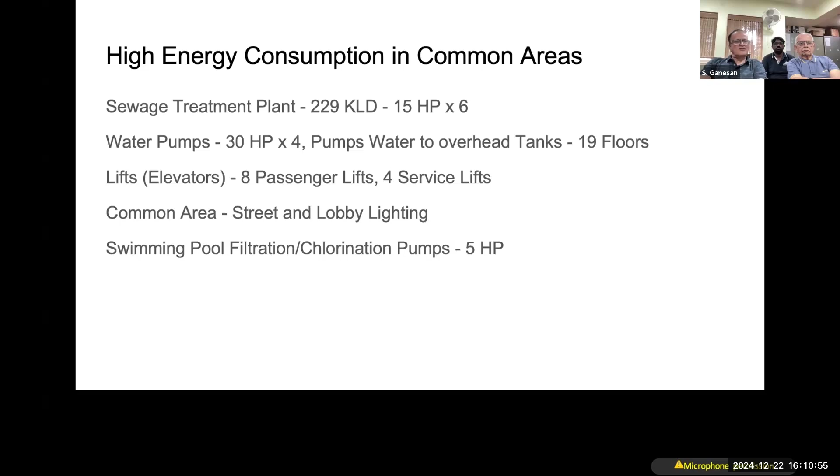What contributes to this bill is majorly the sewage treatment plant, which has something like 6 numbers of 15 HP pumps, and the water pumps for drinking water, plus recycled water to the overhead tank, as our building is around 19 floors, and lifts, common areas, street and lobby lighting, swimming pool chlorination, filtration, all those things. These are the major loads we have. And this is something we have been highlighting throughout the presentation: how we have been pushing for clean energy, personally as well as a community, not only for power, but for other areas as well.

What are all the considerations here? Based on the available rooftop area, we determined that about 300 kilowatt peak was possible, not more than that, but we could have possibly gone for less. But we have other considerations, like we have 6 BESCOM meters. We are not talking about the residential meters. For the common load, we are connected to BESCOM through 6 independent meters. Each meter has a capacity of more than 50 kilowatts. Sometimes it could be 60, sometimes 120. It was all above 50 kilowatt. So it made sense for us to go for solar power.

Maximum allowed at that time was 50 kilowatt, so we decided to go for 50 kilowatt each, except where it was less than 50 kilowatt. This is what made us look at 50 kilowatt as the individual solar generation capacity. And actually 50 kilowatt was not allowed by BESCOM. We had to slightly reduce it, so we ended up with 49.5 kilowatt peak.

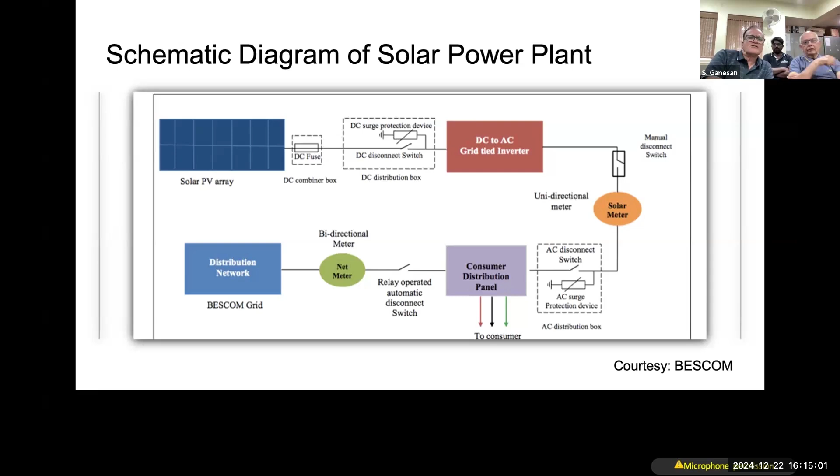So to put it simply, the net meter is a new one. This is the basic explanation about what net metering is all about. Maybe most of you know about it, so I don't want to linger too much on this.

So here we have represented a house - I'm sorry, it is not actually an individual apartment, it is the common load for the apartment. From BESCOM on the right side, the one which is N is called the net meter. The net meter is supposed to be a bidirectional meter. From the solar panel we have an inverter, which converts the DC from solar into AC, and the AC is fed into this junction point - that's a unidirectional meter. So right now, what is involved is to put this bidirectional meter, the solar panels, inverter, and the meter. This is what the total project installation entails.

If you talk about what 'net' means, it is this meter which is actually doing the net of what you import and export. All these years, possibly we have only been importing energy from BESCOM. Once you connect the solar, there are times when you would be exporting power - say on a holiday with low consumption, solar power could be exported back into the grid, especially peak summertime on a holiday season. So this meter calculates: whenever you import energy from BESCOM it rotates one direction, and there's another calculation for the net export from the whole system. The difference is the net import - that's why it's called a net meter, and that's what you pay BESCOM at the end of the day.

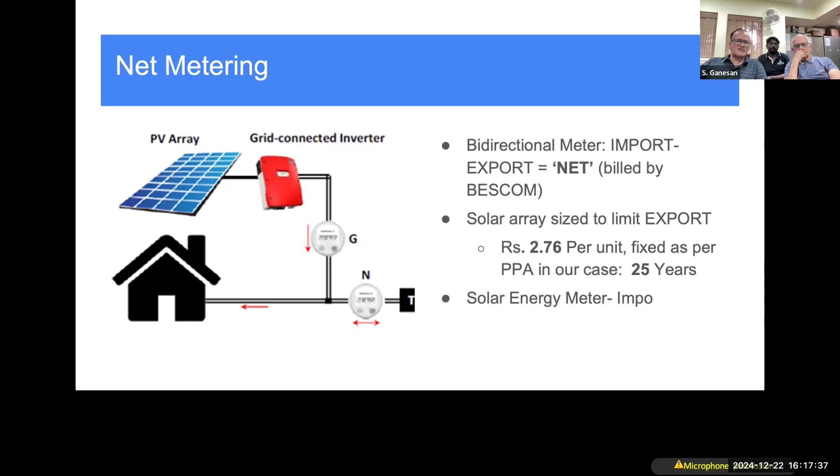A few highlights here: we should realize one or two points. One is that when the BESCOM power is out, the solar inverter would also get automatically switched off. So let us not imagine that when BESCOM power is off, this would act like a UPS and supply my load. No, your DG system would continue operating as usual as if there is no solar installation.

Number two, most of the apartments are quite tall and prone to high wind situations during some seasons. So as an extraordinary precaution, we made sure the panels are installed lower than the parapet walls on the 19th floor. I have seen some installations where they raised it above the parapet wall through structures. That has to be checked through a civil structural engineer. We did check the additional load at the top of the floor and what implication it would have on the structural stability of the building. So those things also need to be looked at.

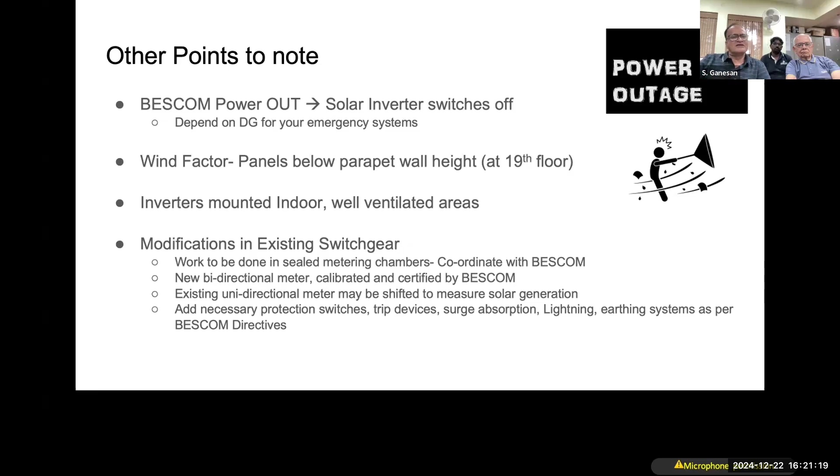The fourth point is that the solar portion is one part of the story, and the other part is that we need to modify the existing switchgear in your system to get this new power into the system. That's a bit of a challenge, not very difficult, but it has to be accounted for in your overall budget and time frame. It involves opening up the metering chamber of BESCOM, so you cannot do this on your own. It has to be coordinated with BESCOM, because you are changing out some meters and putting in a bidirectional meter. All this is explained further, but just to caution you, a few points I have highlighted here.

This highlights what we have done. You would see that the panels are simply supported on concrete blocks, such that in case of heavy wind force the whole thing wouldn't fly off. They are well anchored, but not anchored to the ground - they are simply placed on what we call a waterproof floor. That is also another thing which took quite some time, because once you install this, you may not have an occasion to remove it again and do waterproofing of the roof later. So take this time into account in your overall project schedule. Once it starts leaking, you may have a problem. This is another important factor.

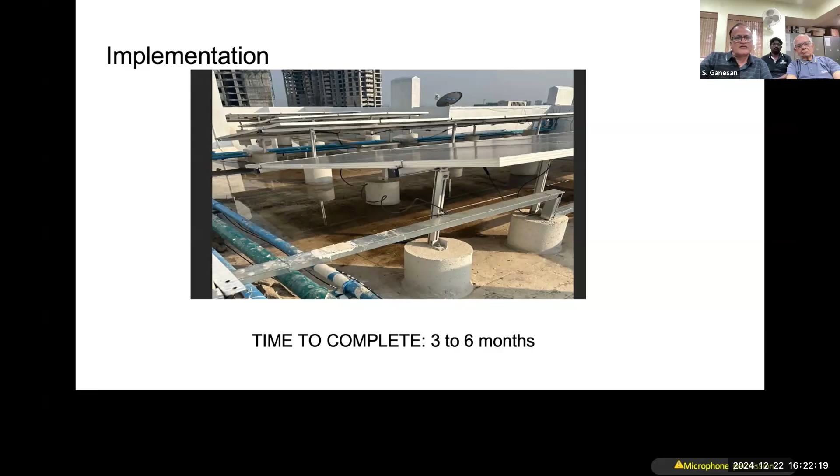We would suggest it takes 3 to 6 months. I think BESCOM themselves, once you go to them, will give you a time frame within which you need to complete. So please take care of this also in your schedule.

So how we went about doing it within this complex, we had two subcommittees majorly. One was to evaluate technical as well as commercial implementation aspects. We had a gamut of experts within our residence - one was possibly a lawyer, one was dealing with money, one was dealing with technical. The team here is all technical people majorly, but earlier, thanks to people like Arun and other experts including lawyers and chartered accountants, we had put all of them in the subcommittee.

So that we have a wider perspective about the whole issue here. And then we also referred to BESCOM documentation. We had a lot of discussions with them. BESCOM has excellent documentation on the website. We also visited multiple apartments in our neighborhoods, also some other schools and other places where we had evaluated multiple vendors. We also visited some of the locations and we learned a lot along the process.

And then the last but not the least is to have an AGM to convince the owners on the benefits. To put it in perspective, both what goes out of your pocket and what goes to the planet from an environmental perspective. So all those things we had to plan.

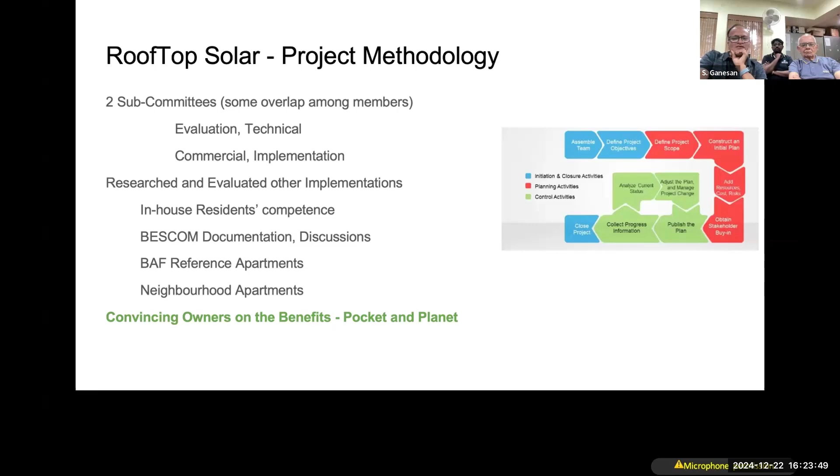Just a ballpark estimation, take it or leave it 20% this side or that side - the area required on top of your roof would be around 80 square foot per kilowatt of capacity. Why is this 80 square feet? It is not just the panel area. You need to give space around the panel for maintenance, walking around, running the cables. So you don't consider just the panel area, but we have considered around 1 meter space all around each panel, a row of panels I would say. So that increases the total area.

And then we had also the water tank above that, so we needed to align it a little bit. We don't say we are totally shade free - some seasons we do have shade - but we have to optimize the whole area in such a way that at least in summer we get maximum generation.

How much can I generate? I've just given a picture here, it may not be very relevant in this context, but the fact is BESCOM has given you a particular capacity. You have a maximum demand - if you see your bill you will find maximum demand, it could be 50 kilowatt or 100 kilowatt or so many HPs. That's the cable size they have provided to cater to your load. Naturally, you cannot have a Raichur power plant on top of your roof and then try to pump more than whatever sanctioned capacity is. It's purely a technical point, and BESCOM would insist on that. So that's the maximum capacity you can have on your rooftop.

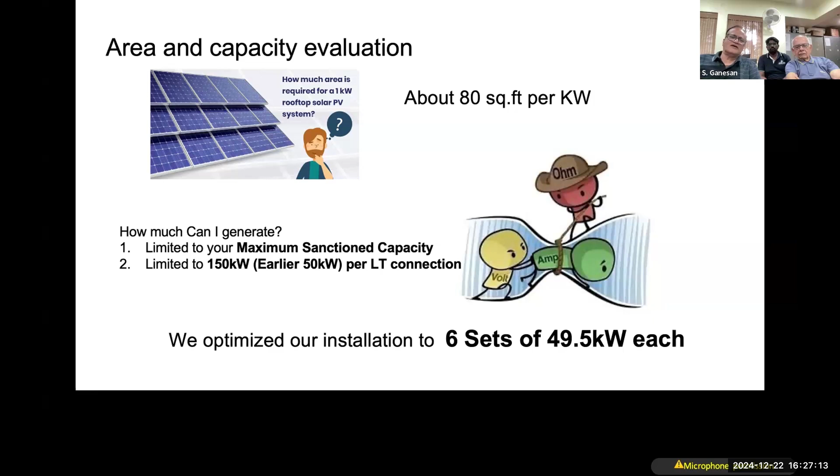Okay, so when you do this, naturally, everything is not in your hand. A few considerations or constraints, I would say, are this. BESCOM to approve projects, because that's the main approving authority, at least in Bangalore. If you're in another city, you need to consider other local things. In case you are talking about a very big plant, then CEIG also gets involved. But there is an exemption by CEIG for rooftop plants limited by BESCOM approval.

And time to complete, I briefly mentioned about it earlier. And waterproof the roof floor. Safety of personnel and residents during construction. This is very, very important because you need to move mountains of material through your lifts, possibly through the lobby or your parking area. You need to temporarily store it. You need to take it up. So this calls for some amount of management by the management committee there.

And we did have the subcommittees who would continuously supervise both on commercial and technical aspects. So thanks to our residents, we did have an excellent coordination there. So we could continuously monitor and bring it to a successful completion of commissioning.

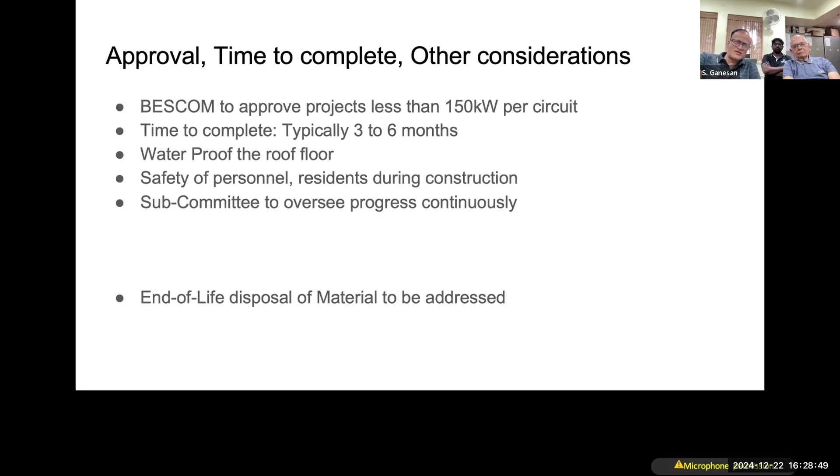And what we have not considered at this point would be what to do with these panels at the end of the life, which is around 25 years. This is a big challenge, not only for you and me, but for the whole humanity. So not only for this, but all the other electronic material, we all know for sure. So this is an open point we need to at least keep in mind.

Okay, the panels are spread across all towers. You can see that there are 4 clusters. Each tower is actually 3 subclusters. This is the picture I picked up from Google, just to give you an idea of what we are talking about. You can see it is almost packed to capacity. So each subsystem is a set of 99 panels. Each one is 0.5 kilowatt peak, 500 watts. So 500 into 99 would give you 49.5 kilowatt.

And we procured these panels from Trina Solar, which is also having a local office here, and I think manufactured in China. And string inverter is what we have decided. There are multiple things we considered, but we decided to settle for string inverter, which is a Sungrow. It's basically a Chinese company, but they also have office here. And as far as the inverter is concerned, it has got an input maximum of 500 volt DC and output is 415 volt 3-phase 4-wire AC. Sorry, it's a bit technical, but I thought I'd just share this information for everyone's use. I'm running short of time a little bit at this moment, I guess.

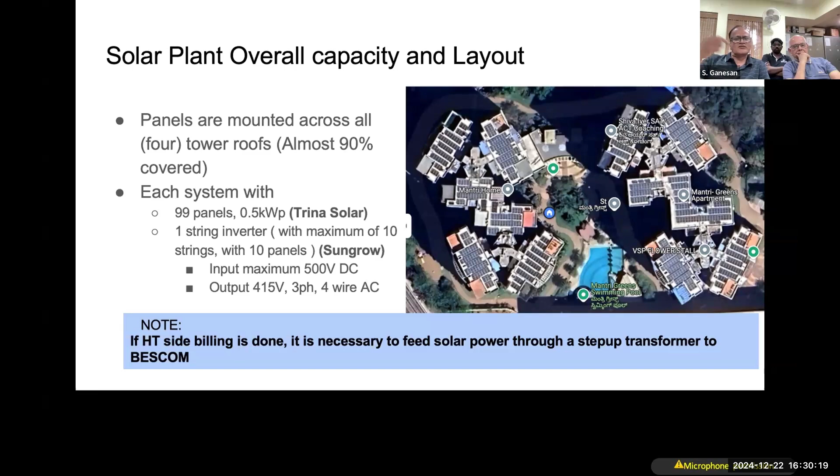The accessories that go with the solar panel, one would be basically the inverter. We have decided to put it indoor, though the vendors would say you can have a small shed kind of thing and put it outdoor. From pure personal safety as well as longevity of the sensitive equipment, we have decided to mount it indoors. We did have enough space in the roof floor where the stairs end, so we have mounted the inverter and associated protection fuses and MCBs, switches in the same floor as the rooftop solar.

And you can see the power cable running from here. So the individual cables are coming in here from the solar panel, not visible here, but the inverter converts it into AC. This is the three-phase 415-volt cable going to the substation in the ground level. And this is the substation panel in the ground level, wherein we have made the modification I was mentioning about, changing out the meters and other things.

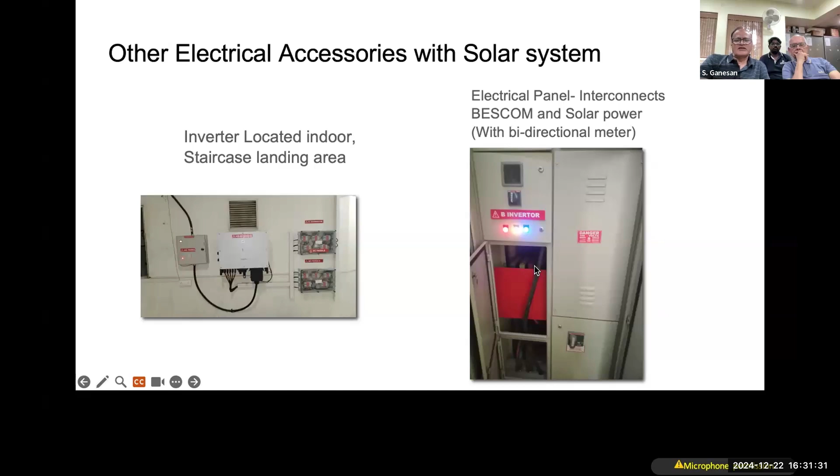So the other most important thing you need to look at are continuous performance monitoring, operation and maintenance. So I initially mentioned that we had a bill like 5.5 lakhs every month. I'm glad to say, thanks to everyone here, we have reduced the bill to about 1.5 lakhs. The energy saving is around 70 to 75% per month. Possibly in peak winter time, it may get reduced to 60%, but by and large, we are very happy about the overall performance of the system.

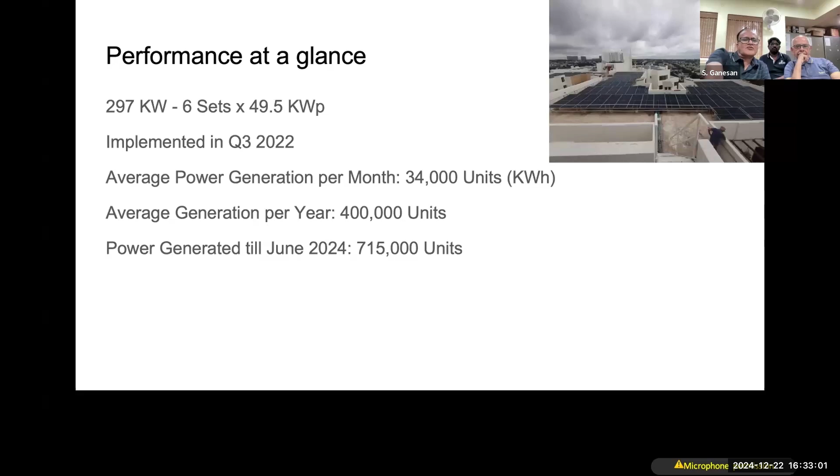So this is just a summary of what we have achieved so far. The first two lines are what we have done earlier, and then this is the total generation we have done so far. I just leave it to you. Consumption per year? No, it's only 1 year. Is it 1 year? Per month? No, I'm talking about the whole thing, per year. I'm talking about the last line, 715,000 units we have saved till now. Yeah, generated.

So we expect full recovery on the investment by 2029, another 4-5 years to go. And by 2047, we expect this to be totally decommissioned. And you might also be aware that the efficiency of the panel compared to when it was brand new would go down by 0.5 to 1% every year.

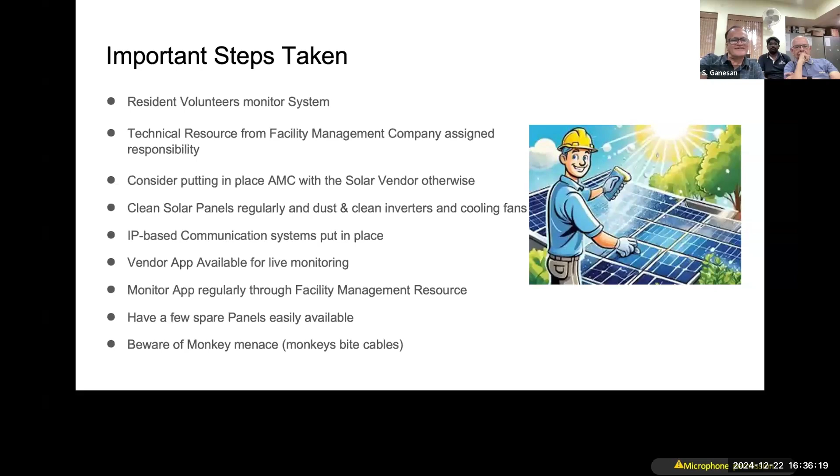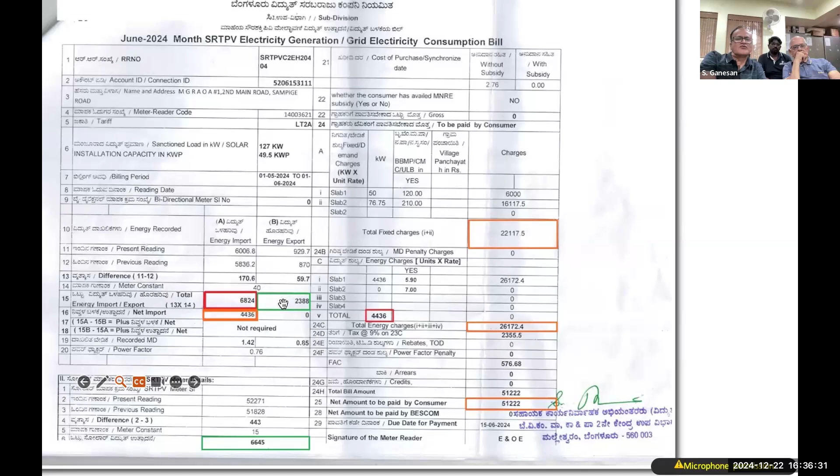Another interesting thing I want to share: the previous summer we had a hailstorm. Nothing happened to the panels, so we were keeping our fingers crossed. Everything was fine, so we are very glad about that. And this is a typical BESCOM bill. I don't want to get into the detail. What is important to know is that BESCOM gives two numbers: energy imported and energy exported. The difference is what you have consumed or exported net, and based on that the billing is done.

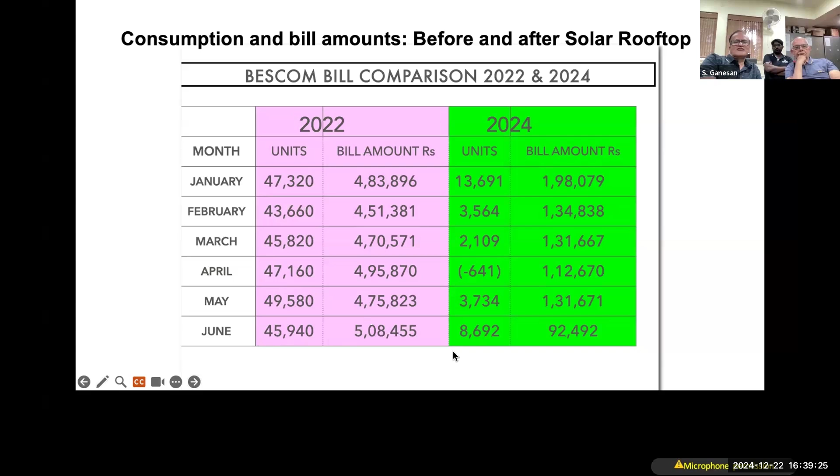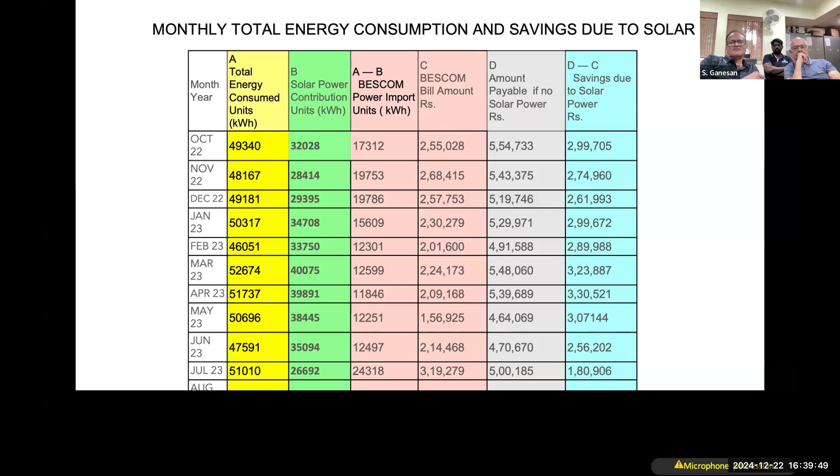So we have an analysis being done every month, and it is reviewed by the volunteers, the facility management, and it goes to the management committee for review. And we have a screen in our management committee room where live performance of this plant gets reflected every day. Whatever you see here is also reflected there.

So this is a summary of what has been achieved in 2024 so far. This is the monthly total energy consumption, of which solar has contributed 60 to 70%. In the month of April, it was even exceeding the total consumption. We did have net export from our system. So as I said, we have optimized in such a way that we don't export too much throughout the year.

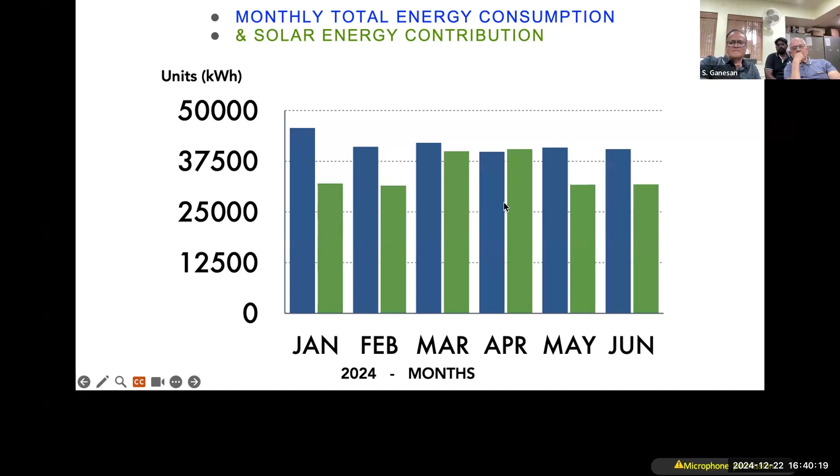And this is something beyond our individual apartment complex. We talk about what is going to be saving for humanity as a whole. In addition to whatever we save, BESCOM and KPTCL would also save 1% each towards transmission and distribution losses of whatever power you are consuming. This is another thing which we are not able to project here, but we have calculated very roughly that over a year they are going to save 8,553 units because we have installed solar plants here.

A very conservative estimate. Next steps: having invested some money, we need to also make sure that we bring down our consumption as much as possible. So we have made tremendous efforts to make sure we have LED lighting everywhere in the common area, and motion sensor based lighting. This has reduced our consumption by a great margin. Automated time of day lighting, switch on and switch off for street lighting and other things. And we have also started putting EV charging as a common facility.

In future, when battery prices really come down, we may be able to incorporate battery storage. Possibly we can kick out our polluting DG sets eventually from all our apartments. So this is our vision. At the end of the day, as a community, we are committed to affordable and clean energy. So that summarizes our inputs to you at this moment.

And ongoing maintenance is also an important aspect. Please don't leave the installation by itself. Please, on an ongoing basis, maintain it, treat it, clean it, monitor it. If there are red alerts, please focus and resolve them. Apps are available for you, your services team, to be able to get to know about issues and promptly resolve issues. Yeah. With this, I will focus on Q&A. Unless Satish has to add something, I will jump to Q&A. Satish, you want to add something here?

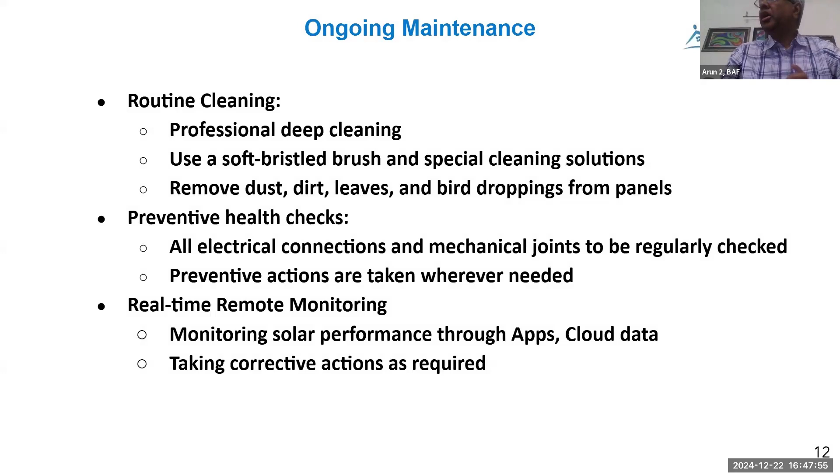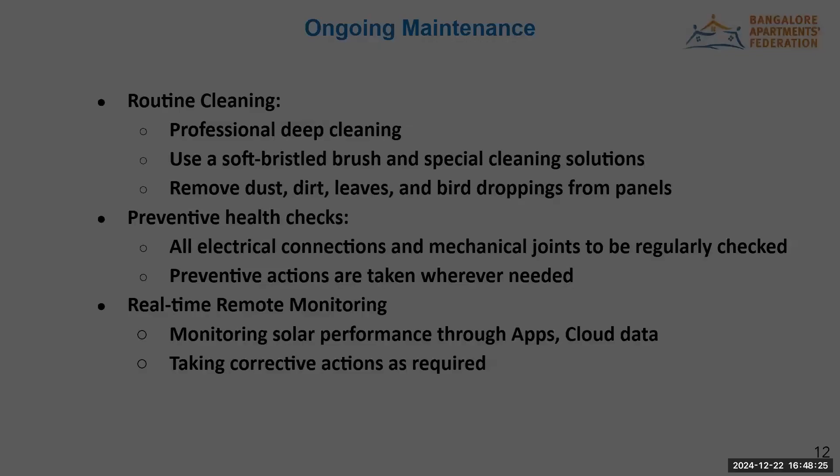Yeah, two, three points. Okay, good evening, everybody. Thanks, Mr. Ganesan and team for the excellent presentation. I think most of the things are covered. But having worked on this policy and solar from 2018 onwards, I just want to share some things. I think Mr. Ganesan mentioned two things. One is future steps. The future steps include going for a storage system. I think that policy is implemented now from KERC this year, 2024. It is possible to do that, provided it is financially viable.

The second thing Mr. Ganesan was mentioning is when there are power shutdowns in BESCOM, the grid is also disconnected. So it is not going to the grid. So there is a problem in the sense you may be producing solar energy and electricity, but since it is connected to grid and net metering, this power is not going to the grid and you are losing. And in some of the apartments in the city, definitely this problem is there. For example, some 2-3 hours every day, power is not there. It is running on DG.

So we have been fighting or lobbying with the government from 2021 onwards. And happy to share that technically there is no problem. It can be synchronized with your DG. And you can save about 80% of the cost of the DG you are running. Because as soon as BESCOM power is switched off, your DG is going to start. So this is possible technically, but of course, government policymakers had not gone through this process. So the Ministry of Power first said that technically there is no problem. We will include this in the next policy.

That way, I think from 22 onwards, now 24, in a recent KERC notification, it has come saying that you can do some synchronization of the DG set when power goes with the solar. So that's a good thing: DG power, diesel cost, you can reduce by 80% if you do that. Subject to some approval and all, that is okay. It was technically possible before, now policy-wise also possible.

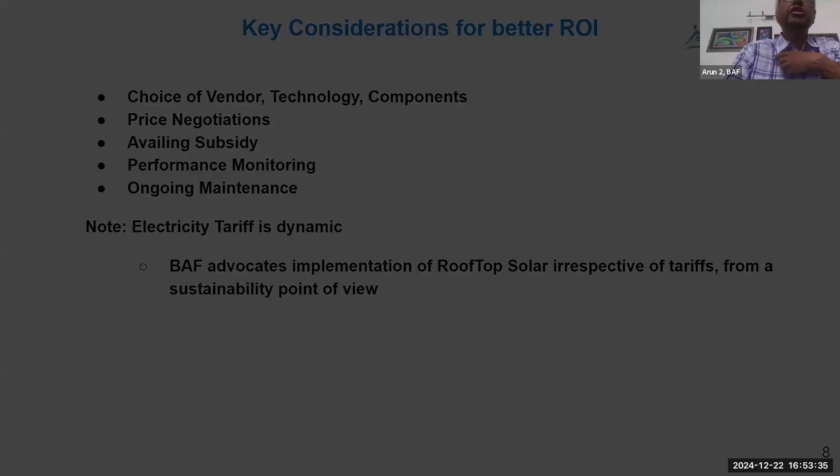Yes. Thank you so much. Thank you so much, Satish. Very valuable inputs. I'll sync up Mr. Ganesan also with you, so that DG synchronization, etc., can be done.

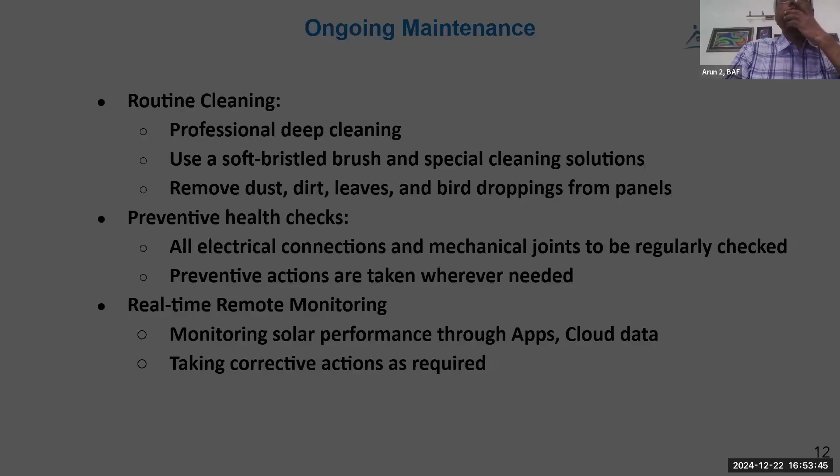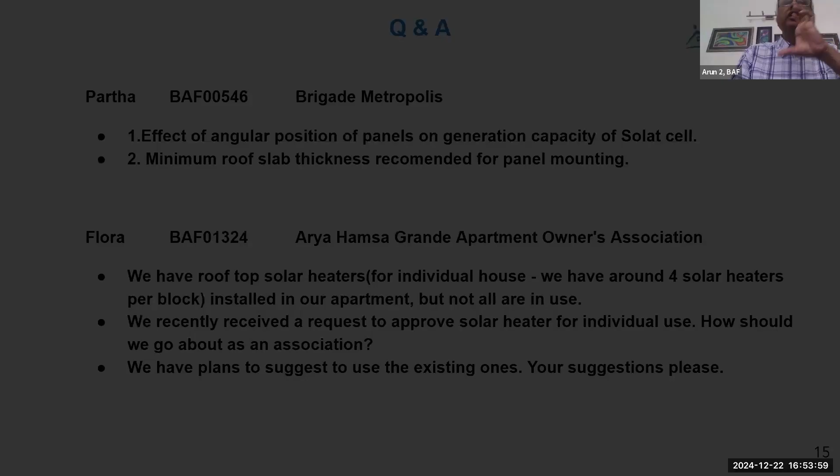Sure. Okay. So we've received a series of questions. Sandeep, I have your set of questions. Partha, Flora, I have your questions. Prakash Shetty. What I've done is logically group them so that we're not going back and forth. Prakash Shetty, Sundararajan Muthusamy, Professor Rajagopalan, Sritej, Parthiv, Vishwa Venkat Reddy. Gyan Iyer excused himself saying he has some guests, but he had a lot of questions. Pramod, it was nice meeting you yesterday at Climate Action, BBMP. Surjit, Natesh Muttanna, Sandeep.

Okay, now coming to the focused set of questions. Mr. Ganesan, Sandeep is asking about technologies for solar, merits and demerits of each technology: string inverter, power optimizer, and micro inverter.

If you can take up this and respond, Mr. Ganesan. I don't have a slide for that particular one. No, not a slide, just look at it. Okay. Sandeep, are you there? Sorry, yes, I'm Sandeep. I'm there.

I think you're on two computers. Mr. Ganesan, can you hear me? I think you have to switch off Mr. Vishwanathan's phone. Please go ahead. Okay, I'll just briefly explain, no need for any slides here.

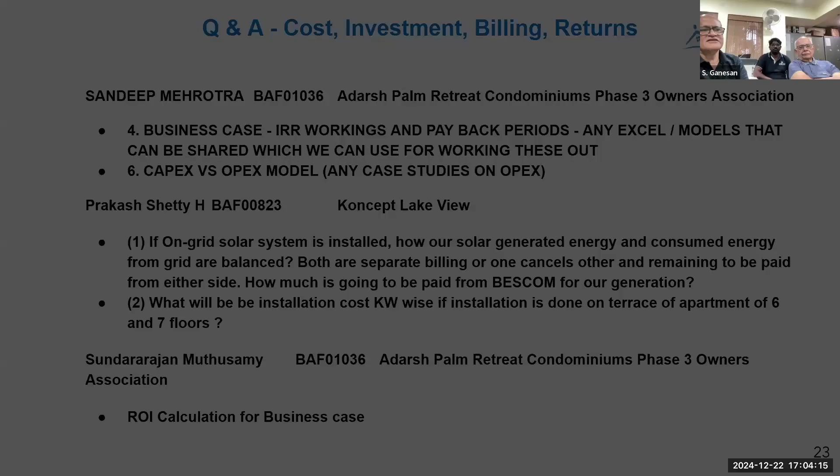That's all I'm saying. Are all panels installed in zero shadow areas? No, so this is where we do optimization. Sundararajan, we covered this question in the previous slide with Sandeep's question. Yeah, that's correct, we can skip it. I think this is best answered, but yes, this was also covered - where you want only AC microinverter or power optimizer when you have shade, a combination should be used. It's not a problem.

Okay, the next broad category of questions is on cost, investment, billing, and returns - again from Sandeep, Sundar, and Prakash Shetty.

Business case, IRR workings, and payback periods. Sandeep and Sundar, we have just shared some spreadsheet images with you. You got to see them during the presentation. May I request that I share some content with you? If you can just put together the IRR calculator and return it to me, that way you will familiarize yourself as well, and it will be useful information back with us, Sandeep.

I just wanted to add, Arun, there is a solar ROI analysis calculator in the BAF website. Anybody can punch in anything and you can get the IRR. The calculator available in the BAF website - that is the pre-implementation, right, Satish? Yes, pre-implementation.

Now that we have data for the past 21 months, I'm requesting if Sandeep can put that together and give it back to us. But Sandeep has not installed it, right? So it is a pre-installation. Oh, I'll pass that. No, I did one IRR analysis with the subsidy component updated.

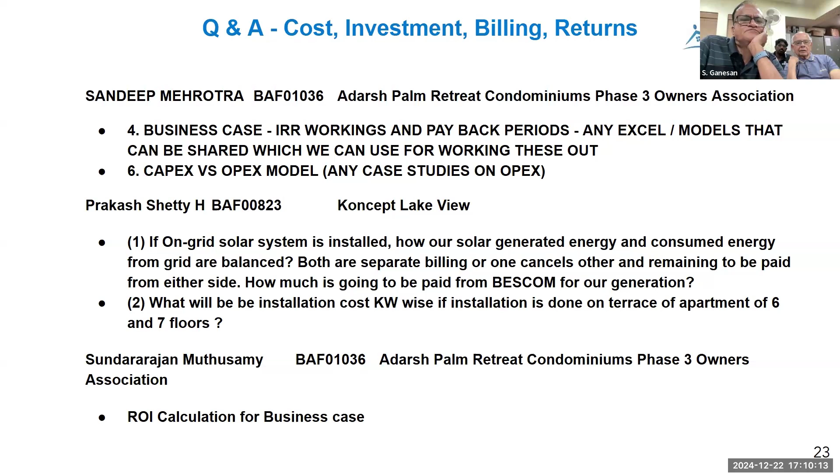So we leave it at this, and you explained about the net metering also. We'll leave it at that because of time constraints also. Okay, fine. You're already running over time. Yeah.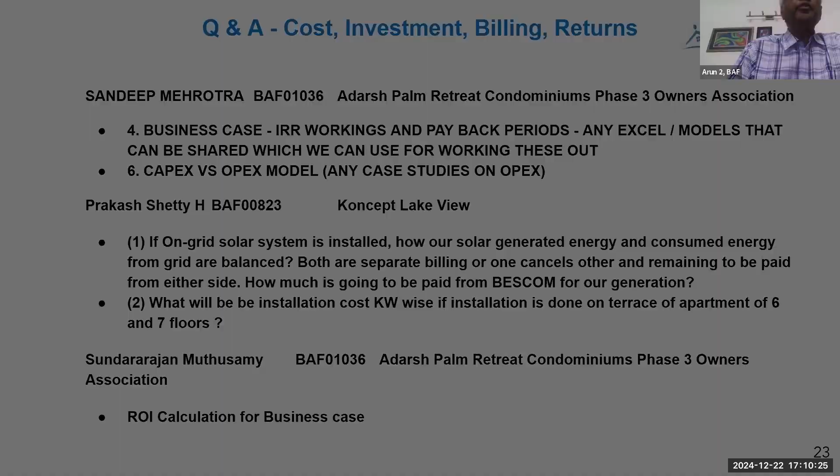And installation cost per kilowatt also we've briefly touched upon during the presentation itself. Cost per kilowatt. Finance option we briefly spoke about.

Pramod, you're there, right? Finance is available, but there have been challenges with multiple banks not offering it. We at BAF are continuing to follow up and push for finance to be available, and hope to see answers soon. But there have been some projects where finance has been available. We'll try and get you connects and see if you can avail finance through those banks.

And Satish mentioned 7% per annum cost of finance. I think Professor Rajgopal is there. You want to add anything, Professor Rajgopal? Because you are using a 500 KVA project.

As of now, what the SLBC, who's a state coordinating agency for bankers, have promised is that they are aware of it. They are awaiting a notification or circular from MNRE to do this, as well as not requiring a personal guarantee. That is another thing which is a big bottleneck for apartment associations.

Yeah, so I just want to add, Satish, we are very short on time. Go ahead, go ahead. Yeah, okay. And Natesh, are you there, Natesh? Natesh not there.

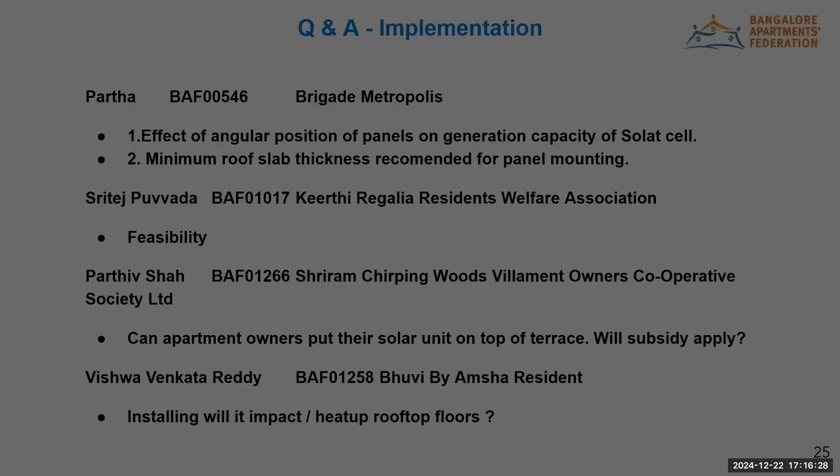Okay, thank you. Sir, I just want to add, through my experience, there are a lot of solar panel mounting accessories available now. Vendors are aware of it, so it is very important that your EPC contractor has a good design for mechanical as well as electrical, because he cannot just supply a solar and install something like that. There are a lot of mounting accessories available to take care of these angle issues and other things, to get the best optimized solution. So solutions are available. Thank you.

Sritej, I don't know what you meant by feasibility, but all of these conversations were tending towards feasibility and assessment also. No sir, Arun, what he meant is different. See, feasibility is very important because every building has its own shadows and other things, right? I think Mr. Ganeshan has told about it. So feasibility is important for any project of this size when you want to invest in solar. Your space may be more, but because of shade at different times of the day, your optimum production will be less.

So when you design, there is a term called sizing of a plant. That sizing will determine the design done by the vendor. So a vendor can do a feasibility study. There are tools available now, software tools. It will take your Google map, map your location of the plant, scan it at different times of the day, calculate what shade is available, and give a space where you can install solar. So these tools are available now.

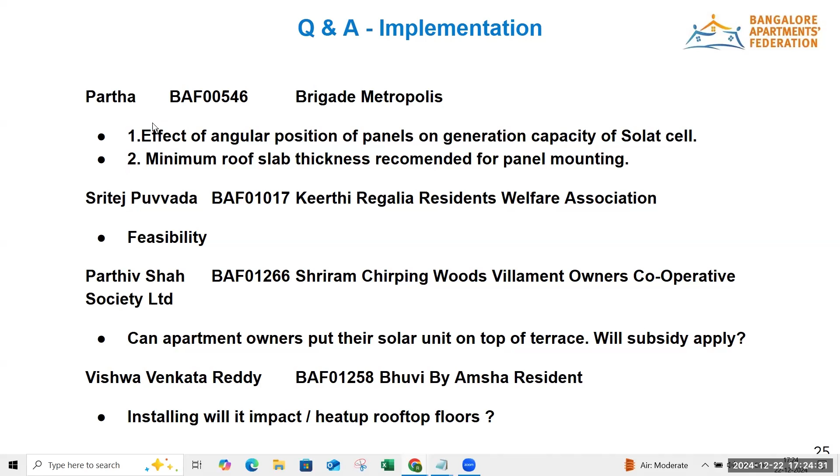Okay. Vishwa Venkata Reddy, Partha, can you take this up? Yeah, so the question is whether it will heat up the rooftop floors, right? On the contrary, this will actually reduce the direct radiation heat during the summer months, and reduce the air conditioning load as well. So it will not heat up; it will actually help cool the rooftop floors. So that's the answer. Great, thank you.

Mr. Rajagopal, Professor Rajagopalan, we are about to implement rooftop solar. We want to learn do's and don'ts. Any further questions beyond? No. I have two specific questions I wanted to raise. Sure, sir. One is, in our complex, which is again a 19-story, 20-story complex, the raised-up kind of structure with concrete blocks is a recommended way of deploying. That is attractive to us for two reasons, which I think we need to consider.

One is our terraces are fire exits, emergency fire exits for the top floor. So if we pack the terraces with solar panels like you have done in your case, the fire exit becomes a tricky issue. So with this raised thing, because 6 feet is the minimum height at which the solar panels will be kept, the fire exit is easily available below for people to move to the next block in case of a fire, especially people on the 10th floor and above.

That is one question. The second is, it also increases the capacity which we can put up in any given limited area of terrace. Because the moment you raise it 6 feet, you don't necessarily need any passages. You can always give them, but it is not absolutely essential. Third is the monkey business. What can we do about it? Nothing can be done about it, right? Arun, I'll answer the first question. Yes, please. All three if possible.